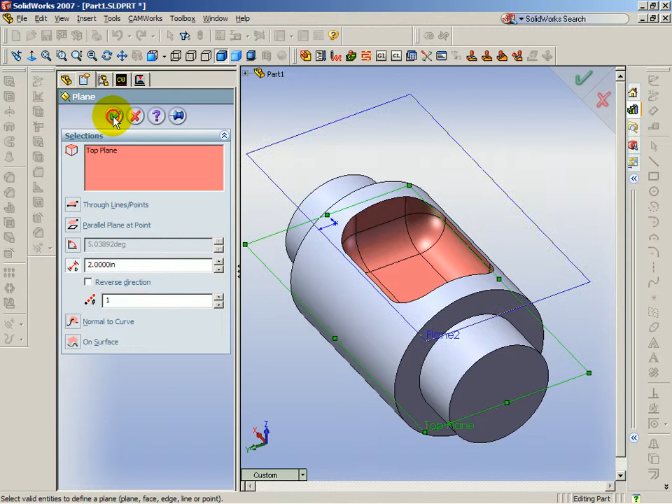To get started on this, we must insert a construction plane above the top of the feature. I'll set this one to 2 inches and select OK. With the plane highlighted, I'm going to insert a sketch. I'm going to hold down the control key and pick on each edge that we want the 45-degree tapered end mill to come in contact with.

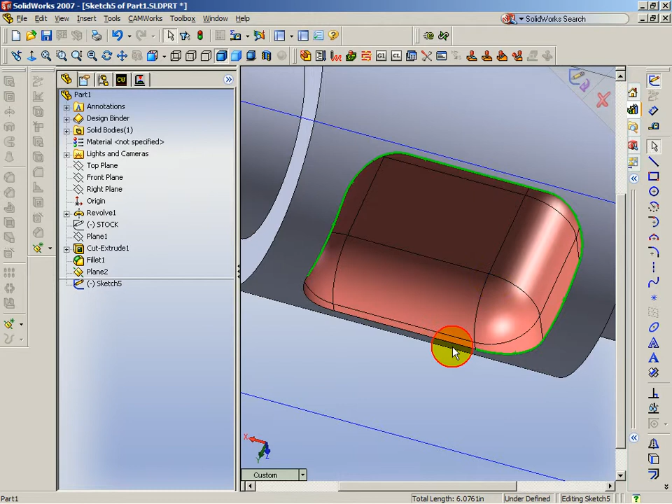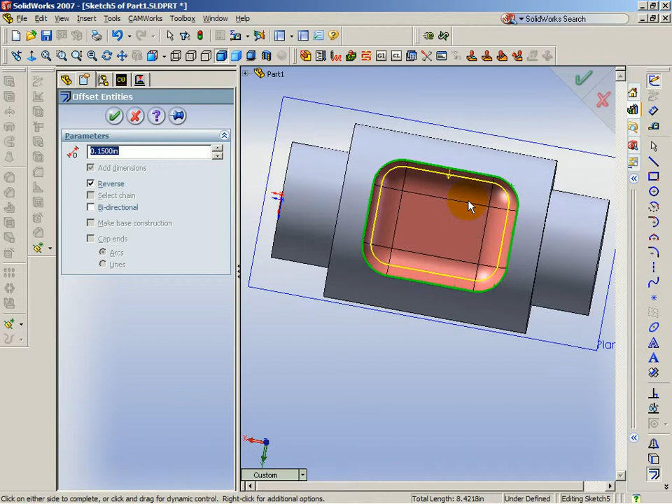Once I do that, I'm going to click on the offset tool and I'm going to set this to 150 thousandths. And I'm going to ensure that the offset sketch gets placed inside this feature or pocket. Here we have our offset sketch.

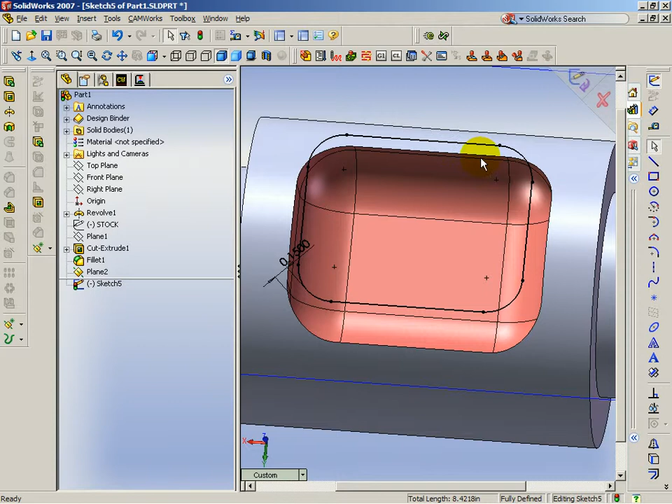The next thing I want to do while I'm in this sketch mode is I want to break one of these lines where I want the toolpath to start and stop. If I don't do this now, CAMWorks will start the toolpath wherever it decides to start the toolpath. If this was an open profile, CAMWorks would start at one end and end at the other end. But in this case, because it's a pocket, what we want to do is break this line somewhere along here. It's where we want the toolpath to start and end.

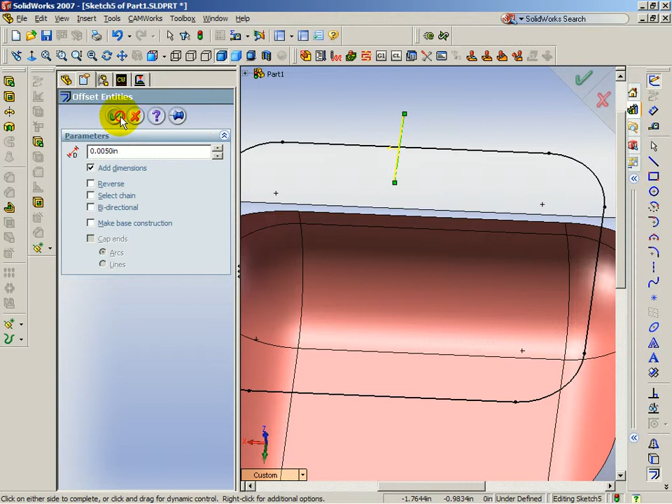So I'm going to zoom in, draw a line across here. I'm going to come down to the offset or offset entities. I'm going to set this to 5 thousandths and then accept that. Then I'm going to zoom in and use my trim tool, split this line and get rid of these 2 lines. Then I'll put in a dimension of 1 thousandths.

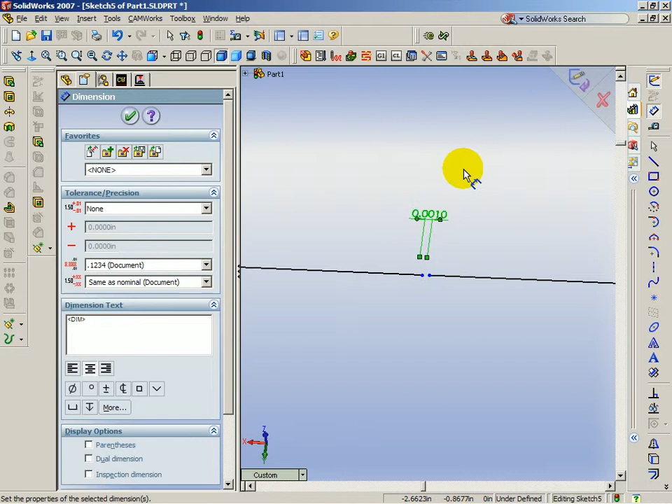You can put in any dimension you want. You don't even have to put a dimension in there. I just decide to do so, for better control over the width of that split. So here I have my sketch ready to project onto this part.

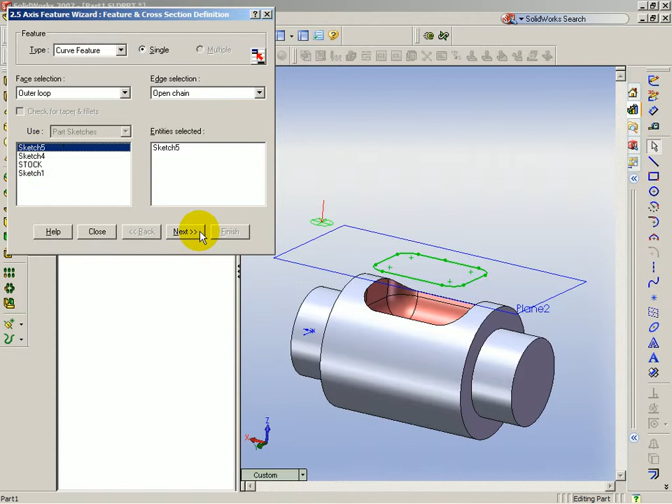The next thing we'll do is go to the CAMWorks features tree. Here I have a mill part set up already. It's basically coming down from the top. I'm going to insert a 2.5 axis feature. And the type of feature I want is a curve feature, and I'm going to select sketch number 5. I'm going to select next, and I'm going to set my attribute to 3-axis curve.

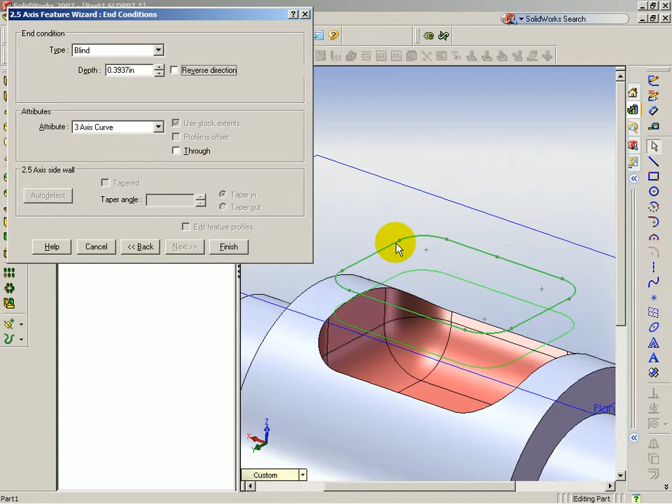This is important. It doesn't matter in this particular situation what the depth of this feature is, as long as it's coming into the part, in the direction of the part. All you're doing is setting direction here. So from the sketch down is the proper direction to project onto this part. So we have that set.

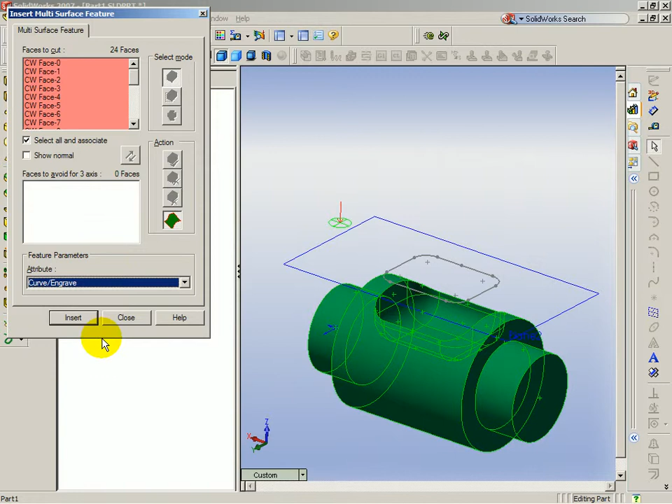The next thing I'll do is right click on the curve feature and I want to insert a multi-surface feature. I'll select all surfaces and come down and select a curve engrave attribute. Select insert and close. In order for us to get this feature to machine with this sketch, we're going to generate an operation plan for the multi-surface feature.

Here we have a curve project operation. In order for this curve project operation to use this sketch, we must add that sketch. We right click on this operation and add an engrave or curve feature. Select add and click OK. Now this curve feature has been added to this operation.

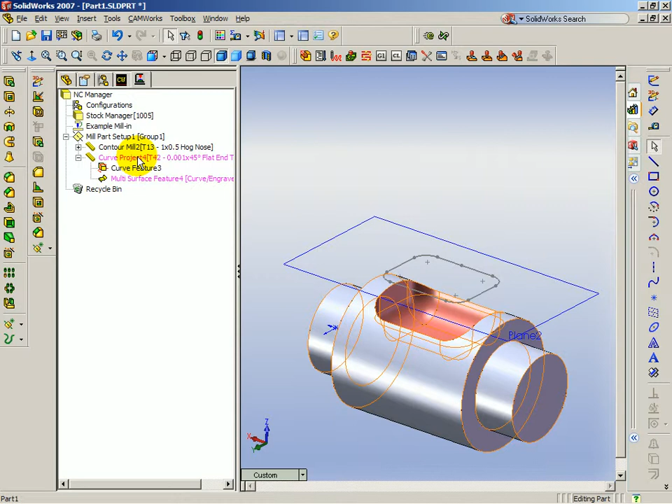At this point, if everything is set up in your operation, which I'll include this file with the video, you can edit this and check out the settings on the parameters of this particular operation. I will right click and generate the toolpath. Now you can see that I have a toolpath coming and going around inside the part following this sketch. The sketch is 2D, but the toolpath is 3D.

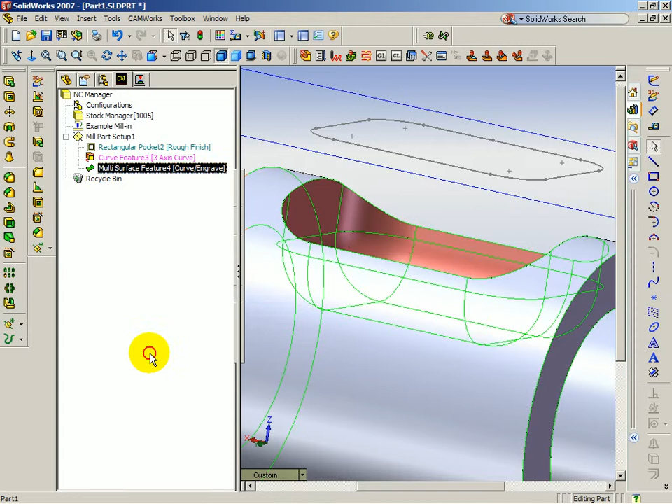I can easily come back and hide the surface feature, hide the sketch, and hide the plane. Now when we come over to the operation, you can see that we have a clean toolpath. But I want to show you that the toolpath is still not cutting the 20 thousandths depth.

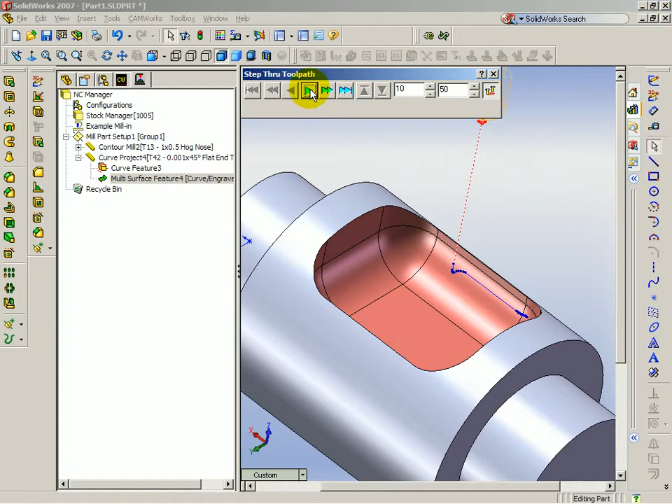If I right-click on this operation and select Step Through Toolpath, and I bring the tool down this far, if we look at the edge of the particular feature, you'll see that this is just tangent with the edge. So therefore I must increase the Z depth of this operation in order to drive the tool 20 thousandths deeper.

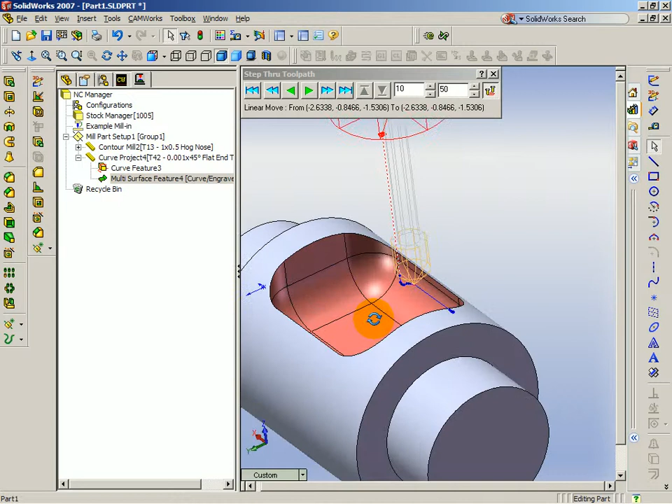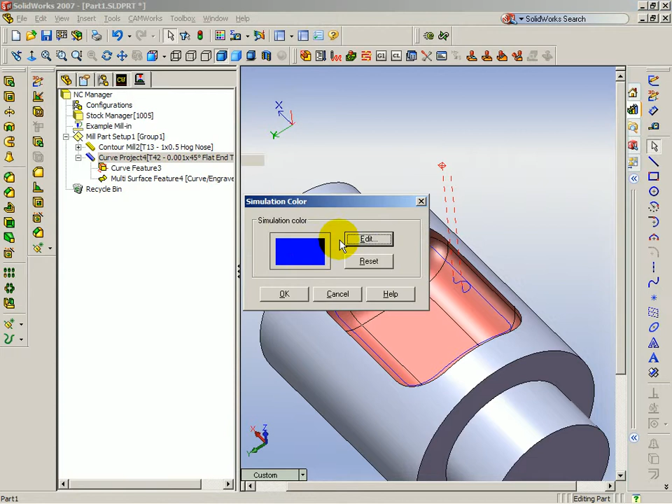So I'll edit the operation, go to Curve Project, and set a negative 20 thousandths. Then I'll click OK and regenerate the toolpath. Once I have the toolpath regenerated, I'm going to go ahead and change the simulation color so that we can see this in the simulation. And we'll go ahead and start the simulation. And here you have your 20 thousandths chamfer on the edges.